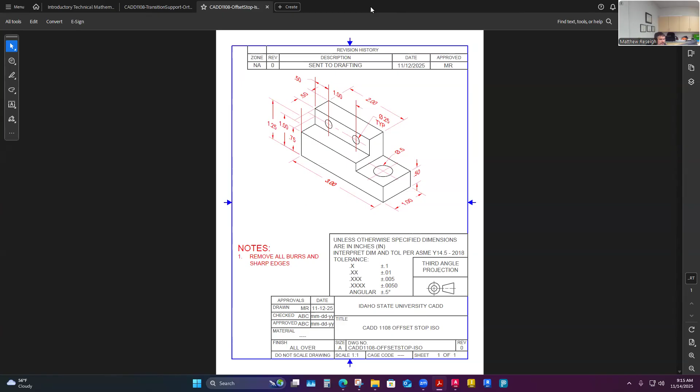And we'll start with that. Good, I like that. And yeah, I think this is kind of where we'll head here. The trickiest part of this is this elliptical, and it even looks a little choppy, but this is a hard one to kind of get at this projection angle.

So I think Casey showed me yesterday a little different technique to get that, and it worked good. So I might try a couple different techniques here to get that. I'll do the way that I've done it before, which is a little confusing, and then maybe we'll try using just a different arc function, because you have all those different arc commands, and you can explore how to maybe get this in there.

So what I end up doing when I get to this point is I kind of just build a boundary, like my little glass box for the entire object. I can build a boundary for where this would fit, because I have the dimensions for it here, so I can build like at least a square grid of where it would fit, and that kind of helps me piece this together. So when we get there, it'll probably be the last feature I put in here.

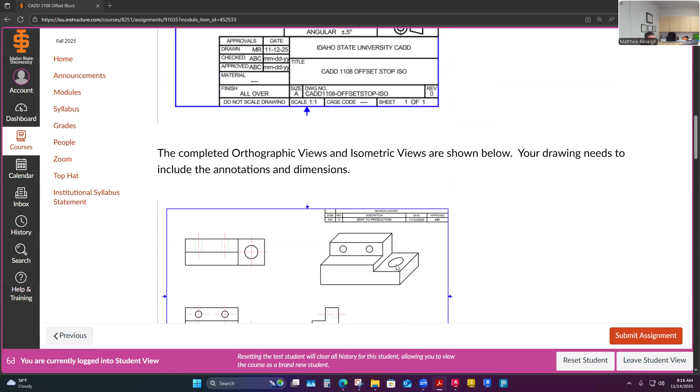So let's jump in and start drawing this thing. So I just need to open a new inch template here. I'm going to put mine on a B-size sheet, so I'll just use my B-size template.

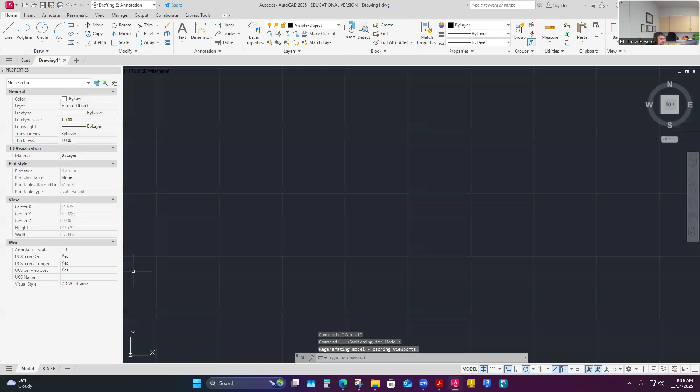And I'll model mine over here. Let's see, let me build my glass box. I don't even use the isometric planes when I do this kind of a drawing technique, so we'll use more of those again next week. So we get back into it - the first one we did this week is the one I like to do. These last two, I just want to do for learning experiences. And then next week I'll go back to how we did the base mount and use the isometric planes. I think that's the way I typically like to draw my isometric.

I do want to take over your life. Here we go. I'm kind of anti-authoritarian, so I hate doing this, but I'll do it for you.

Okay, let's see. So yeah, I'll just draw - if you remember when we do these obliques, we just kind of draw the front view. We use the overall dimensions of the front view as kind of our front of our glass box, because our projection plane is with our eyeballs right on that front view surface. So it ends up being for me just a rectangle. I want to do a rectangle.

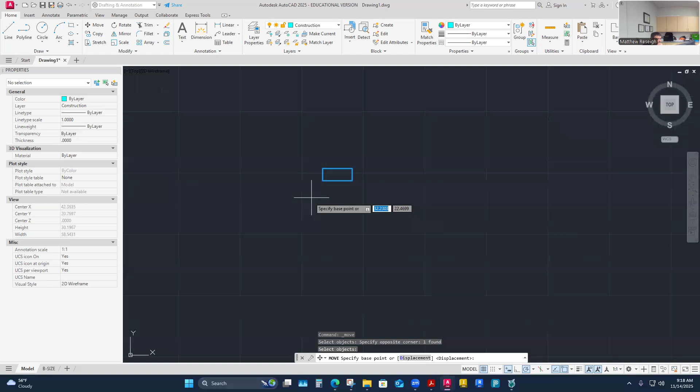That's only three inches long by 1.25 inches tall. So I'm way out here in space. I might just move this a little closer to my origin here for no reason, but here we go.

That's definitely where our front view is going to fit in. Now we're just going to do the 45-degree projections off of that. Let's make sure I got 45 on. Yep, I'm gonna do 45 off of here. There it is, and it's going to be full length now.

So our block is narrow though, huh? It's only 1.5 inches, so it's kind of like a real cube of butter here, it seems like. So let's see that.

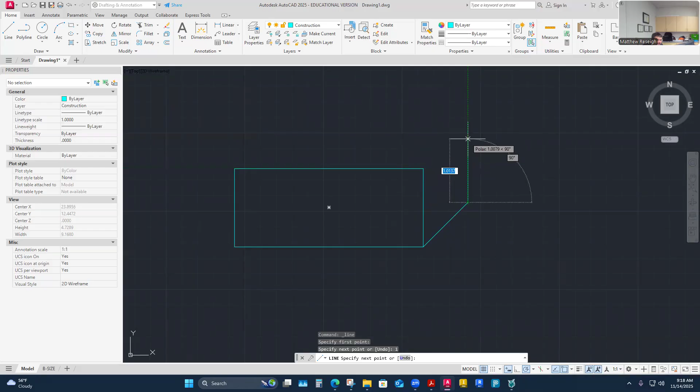I think what you'll notice is your polar tracking just doesn't like this projection angle to be able to pull that like it would on the isometric planes. So I just draw these long, and then I'll have to project over here and trim them as well. But of course I didn't draw that long enough, so I'll extend it.

Then I'll trim these. Yeah, it just doesn't snap. Your polar tracking might not snap to those alignments like it would when we're at the 30-degree projection planes and we have our isometric grid.

You can really use your polar tracking to your advantage to kind of track where they'll fall together. But this is a little bit more annoying, so I have to just piece it together. Like usually on the other one, I can target here and then pull back and it'll kind of pick up both of those at that projection angle. Well, it doesn't here, so I just have to pull it kind of long and then project still at the 45 degree here. Just, there we go.

So I just kind of overdraw for a minute, and I'll put it in the 3 dimensions of it so it'll look correct here.

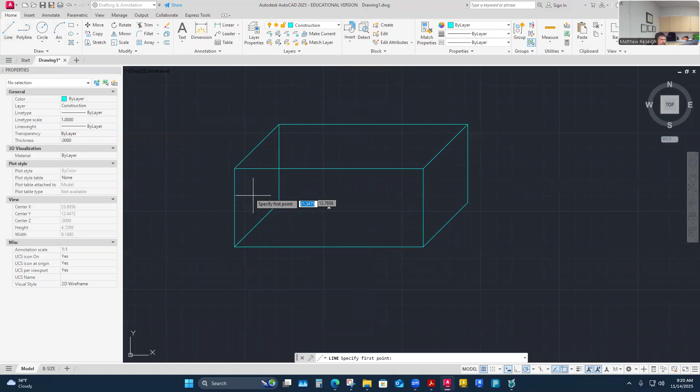So there's that, and down off this straight down to where it intersects. That's the left side surface there. Trim that out. And then we get the bottom surface like this. So bottom and back, there we go.

Here's our glass box. It's not totally necessary to do this. I just do this definitely because I'm teaching. But if you've got the view capabilities, you just draw it in. I get it, you can do that.

So this is just kind of how I show my boundary. My object has to fit in here. So it's just a kind of a tool. It kind of falls in the same way as my orthographic projections.

I always just kind of did those projection planes, but I think as you get more experience, you might just jump right into it, knowing that you have to keep things in alignment, right? So it's like training wheels, but I still use it at times, especially when my objects get complex and I just can't quite get things in alignment. A glass box always helps me solve that because I can just work on those different plane surfaces and the geometry, where it hit joins, kind of falls together.

So if you get lost on something, then just step back and construct some construction planes for you to work with. But I am going to start with this front view, even though it'll kind of bury stuff behind it. I do feel like these obliques are definitely driven by that surface that your eyeballs are on here. So let me just look at my object.

So it's 3/4 — this is the front surface I'm going to draw at real size, right to my eyeballs. That'll make this surface also just be like right perpendicular to my line of sight there too. So...

Let's see. But this is 3/4, and then it comes over. This looks like it's what, 2 inches. So it's just 3/4 up and then 2 inches over. And then this little thing is only a 1/2 inch up. So I definitely can just come in and piece together this shape of the front surface with my visible lines.

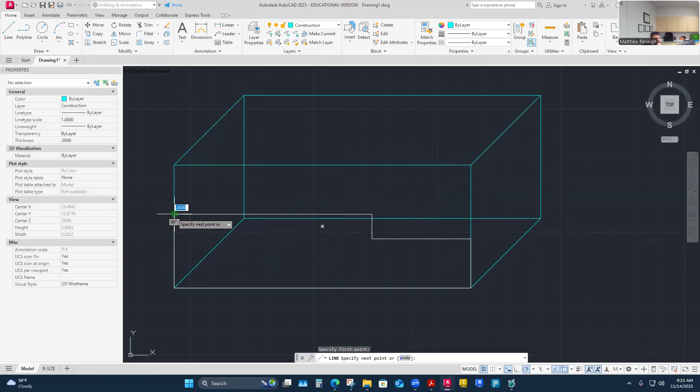So there's the front surface that I'm against here. Now I'll project away 45, right? So probably just do that on construction. I'm going to project these points just across the box, I think. It does come up here at some point to the top surface, but I'll project this one.

I don't know where it ends over there. I don't have something, but I can bring a line across here. So I'm going to pull this just long, arbitrary length. It needs to trim. It's going to somewhere that dimension will come across this way here.

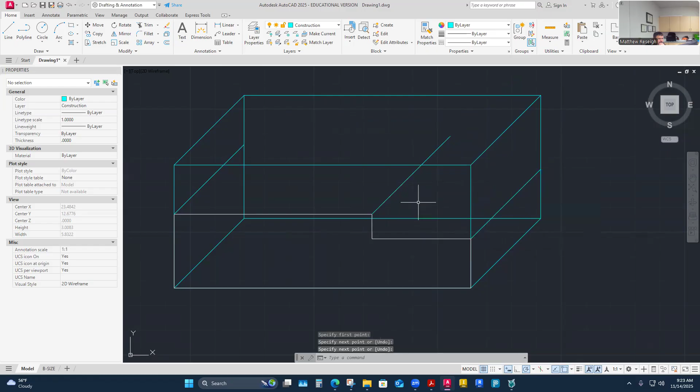I can figure that out too, but this one's easier. It'll just project across to the back edge there. And this one too, I'll project across, but I don't know where to terminate it yet.

We'll get that figured out now. Come across this way. Where it crosses here is this surface. That's as far as that needs to go. So this can trim.

I'll pull up my print and just look at it just a little bit. Yeah. So that one I came across, I'm just going to go all the way up to the top surface. This one I need to figure out how far this is.

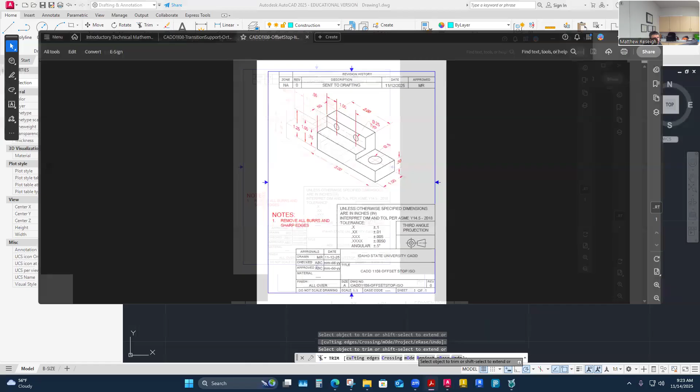I could zoom this in just a little bit. I know it's kind of small. Let's see. Because this surface here, this is a 3/4, and then that's one to the center line. It's kind of weird. This is one to the center line of those holes.

Oh yeah, so this is just the difference of 3/4 and 1 1/4. So that's a 1/2 inch. So really this is just a 1/2 inch right here. And then a 1/2 inch right here. So this is a 1/2 by 1/2 by 2, then down.

Okay, so I think I can piece in the rest of the, I think I understand that. Yeah, I'll do it right here.

I feel like I'm still on construction layer, but from where I left off here, this is coming up to the top surface all the way. So that's the, oh, sorry, wasn't quite trim that. There we go. That's that.

I'm going to definitely trace this in with visible line work. And then this I think is going to trim too, because I'm going to come up from a half, I'm going to come over a 1/2 inch and come up to the top surface. Maybe I'll start that over here and then I'll work back this way.

So definitely have some on my visible layer. I'm definitely going to trace over this. And down here too.

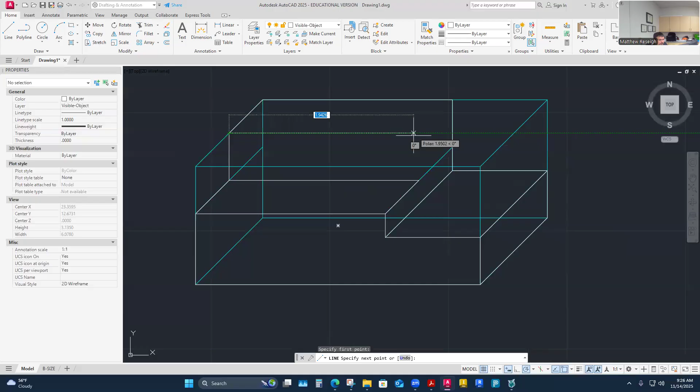It'll project. Like I said, this surface is also kind of perpendicular to my eye line of sight, my eyeballs here. So it kind of is in relation to this. I know we've slid back on 45 degrees and then we pick up this other surface.

Since we're totally perpendicular to this surface, we're going to be totally perpendicular to this surface. That's kind of a strange thing, but it's just because we're not on a projection angle this way. So we just get distorted stuff across this depth mostly than anything.

And the right side, this right side is as for sure. I mean, it's a distorted kind of view here too. But here's kind of a true, these are actually true lengths right here.

And this is a true rectangle. So my circles, what it means is my circles will actually be circles. They won't be ellipses because I'm perpendicular to these two planes. And then I just got to finish this, right?

Now if I turn off my construction lines, I should have everything. I don't really need to trim that because I never traced—that's just construction work. So if I turn that off now, this should be completed. Cavalier Oblique.

Let's do some features in it though. It's got some holes, so I'll do the easy ones first. That'll be these two that go through here. They're through.

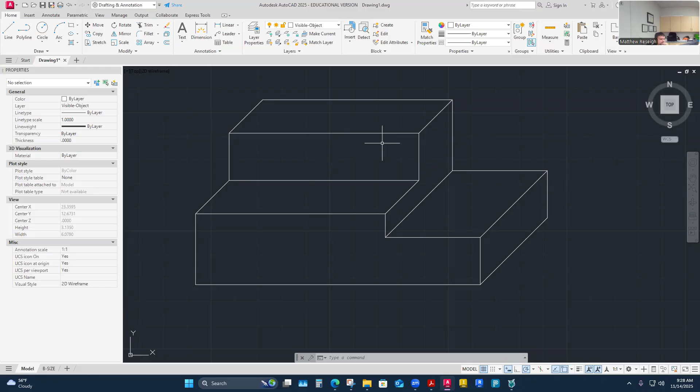So I'll lay them out on my construction layer here. Let me see what their dimensions are. Come over a half inch and then one inch over, at least from the left side surface, half inch and then one, and then come up from the bottom. One inch is this one. This is a little bit weird to see, kind of hard to actually dimension something like that, but what I'm trying to show is it's one inch. If I could track this over, this is from the bottom surface up one inch to the holes, and then from the left surface half and one, and they're quarter inch holes.

Okay, we do a lot of quarter inch holes, I feel like, because we do a lot of 3 by 4 by, or 5 by whatever blocks, small parts.

Let's see, so to lay that out, maybe—which one? Right here, this is a half inch. Half inch, yep, and that means this surface is a half by 2. And this one, yep, this one is a half inch. Yeah, I think that's right, because this is a half inch, total is 1. I don't think it was explicitly given here, I'm just doing a little math. One inch overall, for sure the top surface is a half. Yep, this is a half.

So I can also just come over to the side and say that means if this is 3/4, and that's 1 inch to the holes, just a quarter inch above that is going to be where I'm going to draw my line across for a center line. And then I'll do my vertical center lines at a half inch and 1 inch.

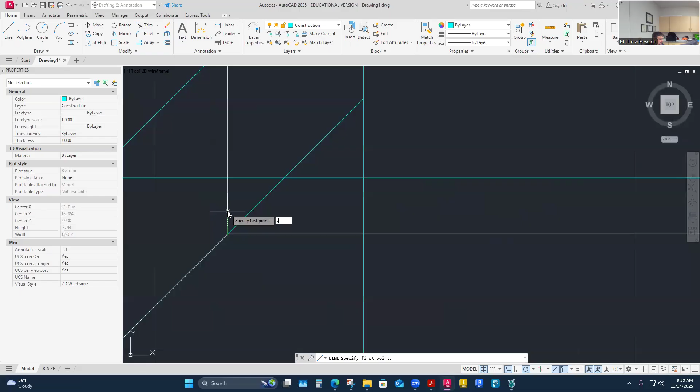So I'll come over here, maybe just up from here—I'm going to do this as construction work, I guess. From here up, it only needs to go up a half inch, or no, a quarter inch right here. Quarter inch there is the center line across. I'm going to draw that all the way across.

That means it should measure from here to the base a 1 inch measurement. Yep, 1 inch is what's given on the drawing.

So that's good. And then I've got to come over a half inch and draw down, and 1 inch from there and draw down. So I'll come over here, cursor over half inch, then draw down and across—at least that, I'll draw it across the surface here. This is the center I'm looking for though, for the hole. And then one more from here over, it's like an inch over from there, and then down.

That should make that an inch—this is, or sorry, that's a half inch, this is one inch. This should be a half inch because this whole thing is 2 inches. So a little check here is that this should be a half inch. Yes, it is. So technically these holes are centered in this surface, I feel like, or at least symmetrical in the surface.

I'm going to draw those in. This one I moved over half inch. This one's an inch in between the two holes.

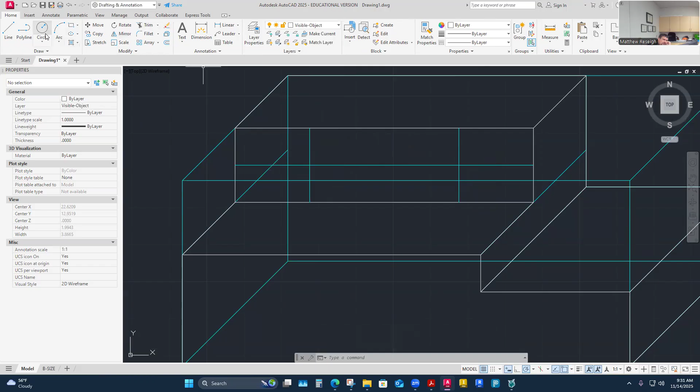Then I need a circle—they're quarter inch diameter. Sure, I'll do circle diameter here: 0.25. I'll copy that circle, just by its base point, and copy it over here.

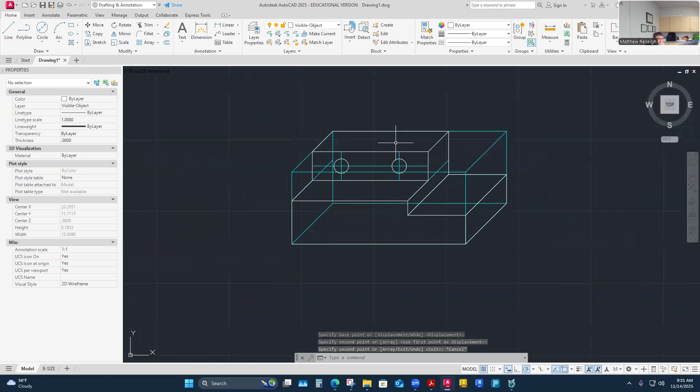And then this is pretty thick. I think I told you on the last one how you would check to make sure you're not going to see that through, is that you kind of need a center line there. So I'll do this check, even though I don't think it's going to show through—you don't have to do this, but definitely get in the habit of checking yourself. This is a half inch thick and it's a pretty small hole.

So if I just project, this is kind of the center line that I'm taking over here on projection, and then I'm coming across an arbitrary length there. But then I'm going to take this center line over too, and where it intersects here—I'm not looking for a midpoint, I'm just looking for an intersection point there. It's kind of close, I'm going to pull that a little long.

And then I'm going to pull this one down to the bottom of that surface too. But I'm just looking for this cross - this is the entrance hole center line, and this is the exit hole center line.

I feel like in our actual 30-degree drawings, it'll show up a lot more where we'll be able to see the exits, some features of the exits from the entrance essentially.

So it's good to keep track of those when you're doing these kind of drawings. How I check that is I'm just going to copy this hole, so this will be a through hole through center, and it'll exit here. You can see that nothing will show through - that's the only time I'm going to keep this as a view, because we don't show hidden line work, we're not looking to do hidden work on these views. I would only keep it if it would peek through and I would see some of the exit hole through the entrance hole.

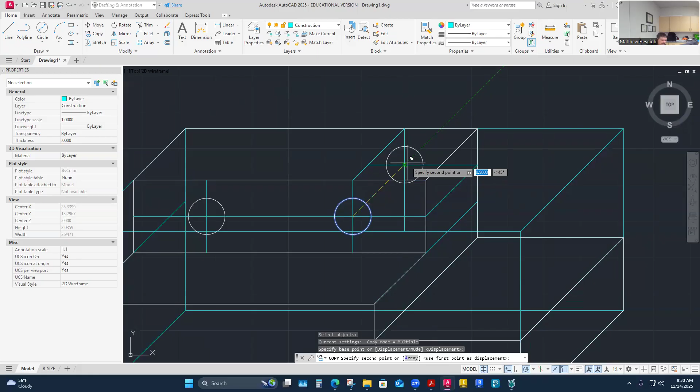This one, it's quite a far distance apart, and it's just because it's a small hole, and for the hole size it's kind of a thick part - it has depth to it that I just am not going to see it. So I can eliminate it, but I do these checks just to make sure so I don't get caught off guard that I should have shown some visible work there.

And then, yeah, see, I can, and then this one. So now what I'm going to do is I'm going to draw this. So now I'm ready to do this elliptical feature here.

And I'm going to draw a center grid here, and then I'm going to draw kind of a boundary for it. And so all it is just this half-inch diameter circle, and it's on center here. I don't even think there's any dimensions here.

That's not great, I wish this should be dimensioned. So I should redline myself to give myself that - this is 1 inch by 1 inch, and so this is on center of 1 inch by 1 inch. You wouldn't know that though. This is underdimensioned, there's no dimensions to this hole.

I've got to do this as a redline. So I should say that this is, you know, half inch and a half inch and a half inch hole. So I'm missing 2 dimensions for this really, now that I'm working off of it.

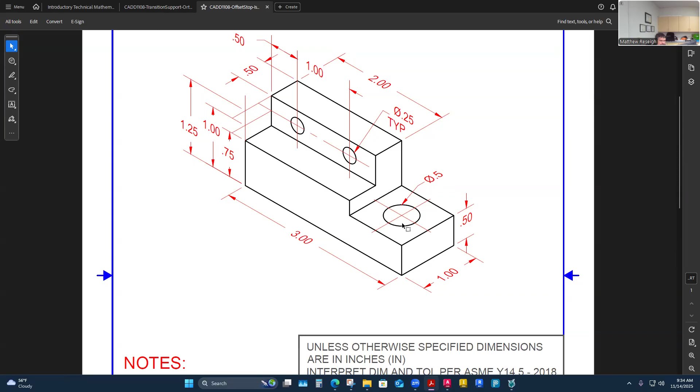There's the midpoint of this line from here to here - that's half inch, right? Move over, there's half inch. I'm going to drag it across to this midpoint. These are my center lines for that hole, at least. That's my first start, that's what I do - center lines. That's where I can start the center of an ellipse here.

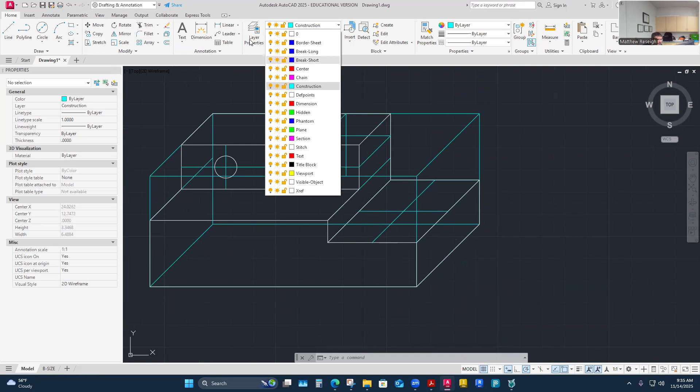You just won't be able to pull up like an iso circle because we're not on a 30-degree plane. So then what I do is I also will build a boundary for it. So maybe what I'm going to do is just quickly build another construction layer - I'm just going to make a copy of this thing.

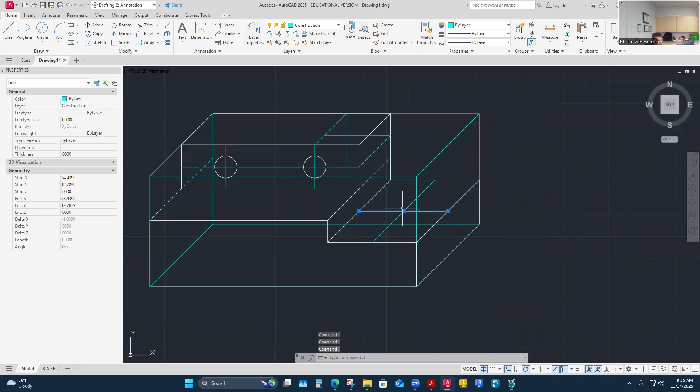Call it construction 2, and I'll keep it the same color. But what I want to do is be able to turn off my other construction layer. So these two center lines I'm going to put on the other construction layer, just so I can focus on that layer there, because I don't need this getting all busy here. I'll jump over to construction layer 2 to draw, so now I'm just focusing on this.

So then what I do is I build the boundary for where that elliptical arc should be in here. And so it is a half-inch diameter, so I'm not going to offset these lines because it doesn't like to offset down this axis necessarily. So I'm just going to draw these lines. I'm going to come over a quarter inch and build myself a little rectangular grid - it's going to be a square grid where the boundary of the ellipse lives.

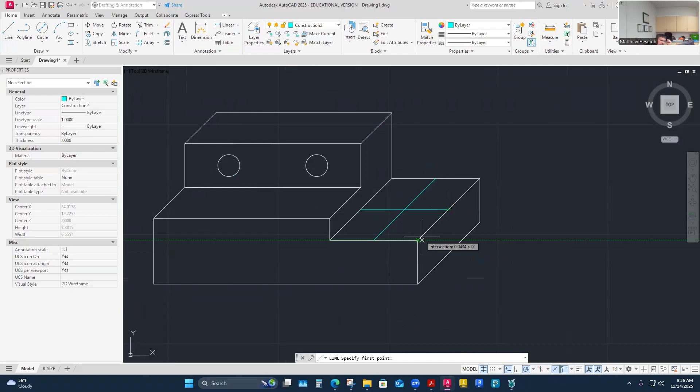So let me think - I'm just going to come over here, maybe just cursor over here. I don't think it'll let me draw that line either. So what I want to do is, yeah, I'm just going to actually draw a line then - it's going to be a quarter inch away, 0.25. There it is, and then I'm going to drag this across.

I'm going to do the same thing here. I'll draw over a quarter inch across my line, then go back across. That ellipse has to be only that wide, from one quadrant to one quadrant. Then I'm going to do the same thing here, tracing this over a quarter inch, 0.25, and draw it across at that projection angle, 45 degrees.

I'm going to repeat that, drawing this 0.25 and across. So I've made this big busy grid here.

All I really need, I can trim this now. All I really need just to see the grid itself. You don't have to trim this if you don't want, but I'm just going to trim it. Mine doesn't like to track.

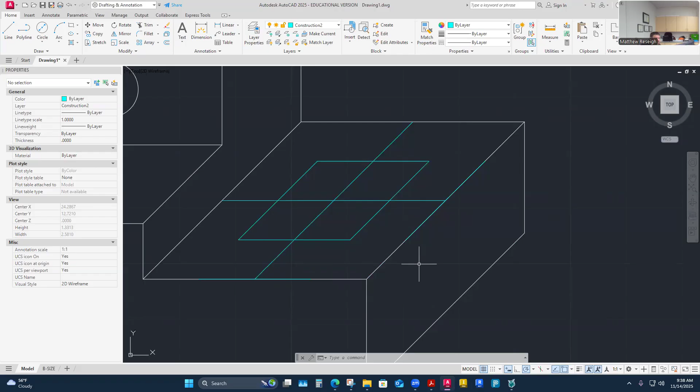I definitely drew those lines so that I could draw across, actually drawing over the top of my lines, because it doesn't like to cursor over when it's at this weird projection angle. So I'm drawing a hard line there so I have an endpoint to pull from, because I just needed to establish a quarter inch off of center each way, and a quarter inch off of center each way here.

So this is just a way to do it. There are definitely different ways, but this is how I get my hard points and drag them across. Then I just trimmed the lines I drew across because it's a little busy.

What I'm showing here is that this ellipse lives in here. It kind of goes from here to there, then comes around to here and back to here, and then back around. So these are the quadrants of this ellipse at a weird 45-degree projection angle, which is just something CAD can't automatically draw.

Or if it could, I'd have to dig through and find out if I can change it. I don't know, I'd have to do a little bit of checking. Maybe it can, maybe it can't, I don't know.

But I can piece this together now.

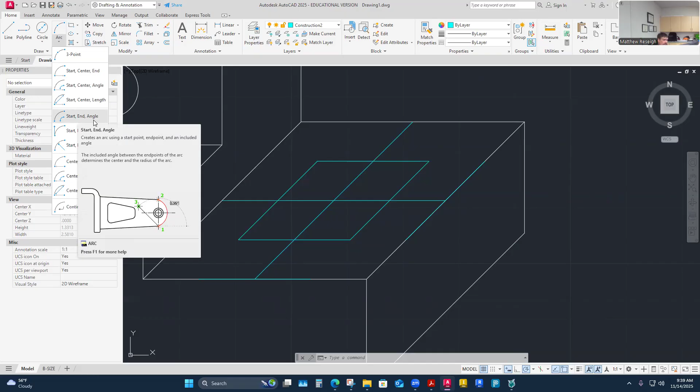I think one thing, the way I think Casey showed me, I'm like, oh, I haven't drawn like that, pulled down a start, end, and an angle. So I can try this. Let me just see how this works and see if I like it, and then I'll show you my way, or the way I did it, which is a little bit different. But start center angle, or start end angle.

So I know I'm on that construction layer just to see this, but this would be like if I'm just looking at what this ellipse is. Well, this would be a start. Specify endpoint of arc, well this is the endpoint of the arc. And then it's like specify the angle of the arc. It might matter on which side I actually start or stop this, but it would be 45, which is what I'm looking to do.

Only I may have to start this the other way. Let me try this again. Same one, start center, yeah, and then this is my...

Actually, yeah, this is going to be the way I would want to do this. So this is at the 45 degrees, so that would be that arc in there. It actually works really well.

Like this, but you have to start on the right point. I could tell that when I picked the other one first, it was going to arc the other way. So I came back and exited the command and started over here on this point, start here, set, end here, and then pull this angle.

So this is correct, like that. That is the arc that I want. There's the center point clear out here of that arc, but it's like drawing an arc at a 45 degree. Yeah, that's interesting, that's a good way. I can't say I've hardly ever even used that command, but now I like this.

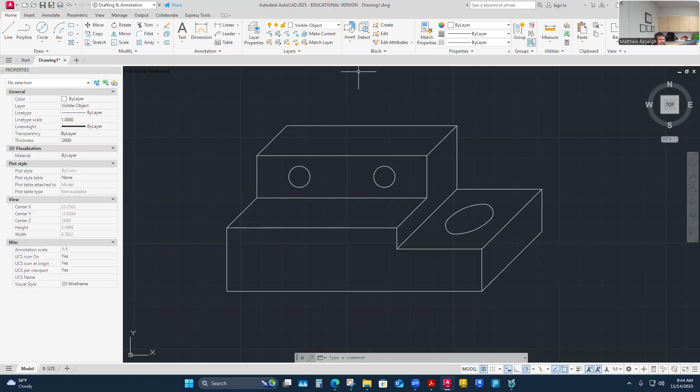So I'll show you the other way that I've done this. You don't have to do this, but I think that's probably the easiest way to do that. So the way I have it is I'll just briefly do a little manipulation here. I'm gonna make myself one more construction layer to show just another method, because the way I did this is a little bit more like pencil.

And I did do some pencil drafting in my early days, never as a profession, but just in some schooling I did for sure.

Let me copy this. Maybe the method that I think is more like a pencil method, because the pencil method will use a few different more construction things.

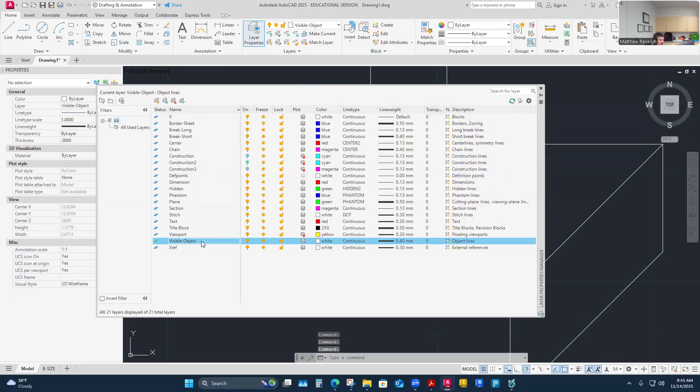Yeah, it does look like it has a point or something. Yeah, I feel like it's like a compromise a little bit. So I'm just making myself a third layer real quick. I'm gonna actually make myself a second visible layer just for a second. This is just for my video purposes mostly, and for one other method of doing this.

So all I want to do is push these segments off for just a minute. I could have just pushed them to a construction layer, but I'll just make a new visible object. It should be clicking the horizontal line, the vertical line, and then going to a 135 angle.

Yeah, so I'm using that depending on which quadrant I'm starting in, but definitely like a start here. And I think I ended up moving this one clear right there, a little bit.

That's a 45 clear out. Yeah, probably the one I'm pulling up there.

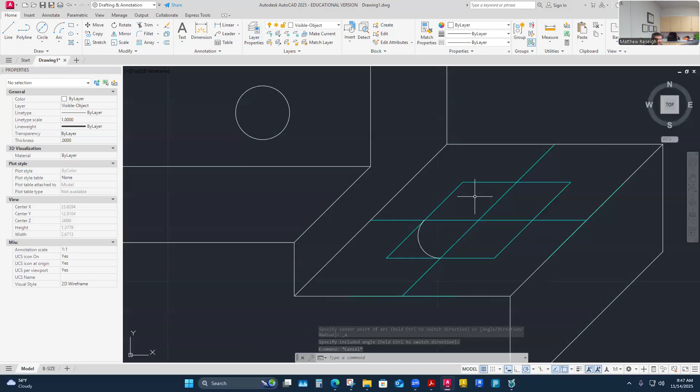Yeah, if you could mirror maybe across here from point to point through here. Yes, that's good. So here's just another method.

This is more for me than it is for you guys, construction layer 3. So, what maybe somebody with lines like a protractor and some lines and doesn't have this awesome sweet command in CAD

would do. They would lay out this boundary and then they're going to drop these center marks down. They're going to look for the center of the arc to draw, whereas that defined it for us based off of its projection angle and the two endpoints in the commands in CAD.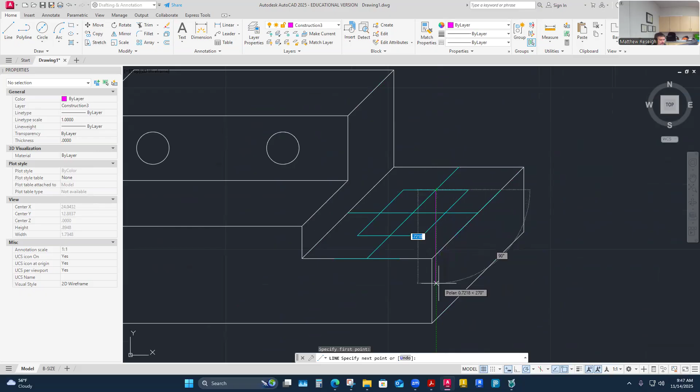They would maybe draw from these centers down, this center down, maybe this center up. If I just think of where I'm looking, I'm looking to establish the center mark for

this arc, and this one is going to be for this arc out here. So I'll just focus on just one quadrant at a time. This would be the, so let me get rid of this one just for a minute because it's working on the other quadrant. But I'm going to draw this one down.

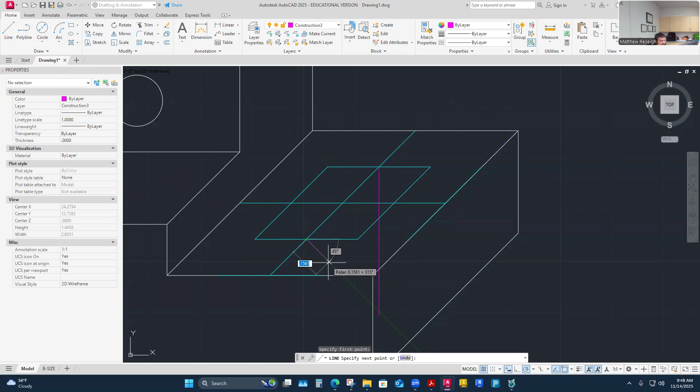Then I would be looking for a center mark, or a center place out here for an arc. So we would drop this one vertically down, and I think we drop this one in from this quadrant at the 45-degree projection angle. And I'm looking for where they actually cross, like this. And this should be the center line, I think, of the arc for this.

So if I was going to draw a circle radius, maybe if I didn't have the arc command, we might draw something like this. And I could be a little, I think I'm a little bit off here.

So let me think. I think hold on with me, bear with me. I'm close here. Let me make sense out of this. Pretty sure that one down.

I don't think it's this one at a 45. I don't think. That'd be clear out here. This one, yeah, not this one. This one definitely down.

That's it right there. So what I'm doing, I guess if that makes sense to me, I should have thought about this quadrant yet. So it's just I'm going to pull one down, and then I'm going to pull one across at the projection angle.

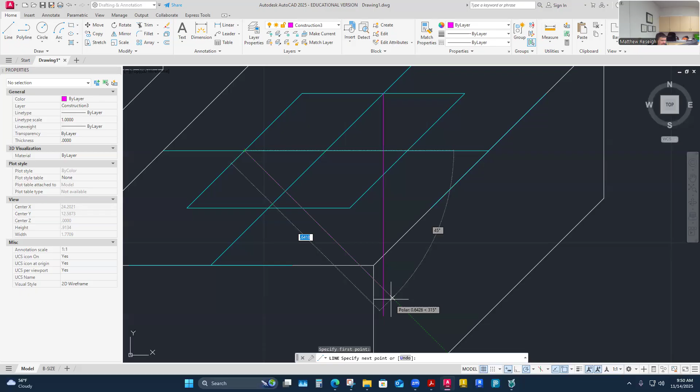This is 45 degrees. I'm going to snap to that, and where that crosses my one that I dropped down, this is kind of the center line for this arc.

And so somebody with a pencil and templates might pull something like this, and then they're going to pull that radius to that quadrant. You can see it's going to make the same kind of section of an ellipse.

So this is another method if you didn't have a quick command, and you can identify geometry maybe a little bit.

This is definitely a little more pencil-y that somebody might do, but this would be something that could definitely identify geometry a little bit because I would do this one, and then of course all this is going to get trimmed out.

And I probably could have done just an arc with a center and the two endpoints, right? Because this is all I really want of that is that.

And then I would have to sit here and analyze, okay, this one here, how am I going to do that? Am I going to drop this one down and one at a 45? But it might take me a little bit of trial and error.

But all I'm going to do is be dropping for every quadrant a center line down. I'm going to be looking for one projected at the projection angle where they cross. I'm going to be looking for a center line here. So yeah, this is a good one to piece together.

So the next quadrant, if it was right here, I have to see. I think some of it I can use the same. It's going to be, I have to visualize, well, this is the arc.

So my center point's out here somewhere for this arc. And where is that going to be? Well, it's going to take me a minute here.

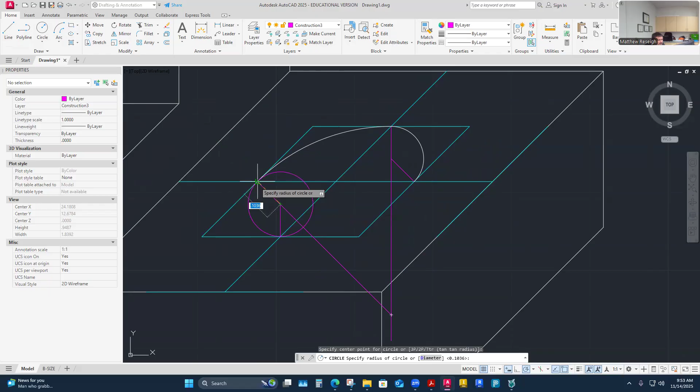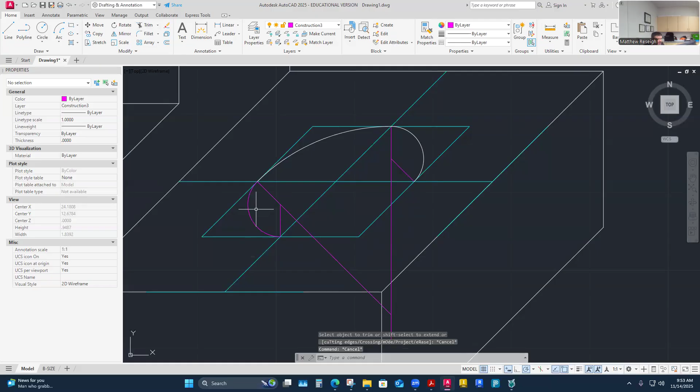And then this one to this one, I've got to kind of do the same little thing. I think I'm going to extend this one up out here somewhere, because it's going to act as my—this arc here definitely has a center out here somewhere. So where is it at? Well, it's where this meets, probably projecting through here. Maybe if I extend this one through, it does double duty for me.

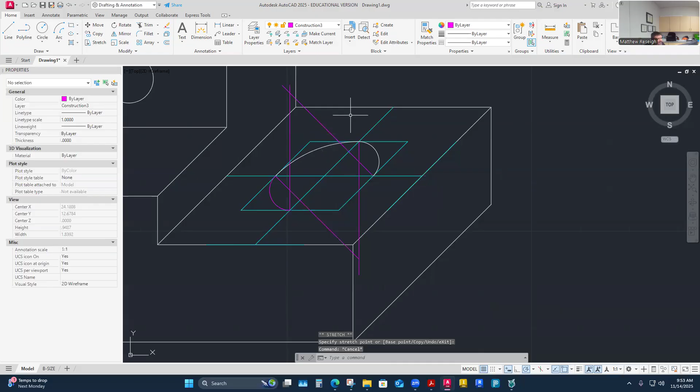Oh yeah, isn't this great? I love this. Oh yeah, it does. This is what I'd call appreciation for our ancestors and how they visualized geometry. They're pretty good. They didn't rely on this computer program with its fanciness. They did stuff like this.

Yeah, so this does go into—you just start dropping lines, you start dropping it pretty much. Somebody probably that was pretty mathy at the time too, so they were just like, oh, I can see easily where the center line is. The one thing that helps me track is that I just kind of visualize—I can visualize where the arc should go even before I draw it, so that I know there's a center line out here where that arc is based off of.

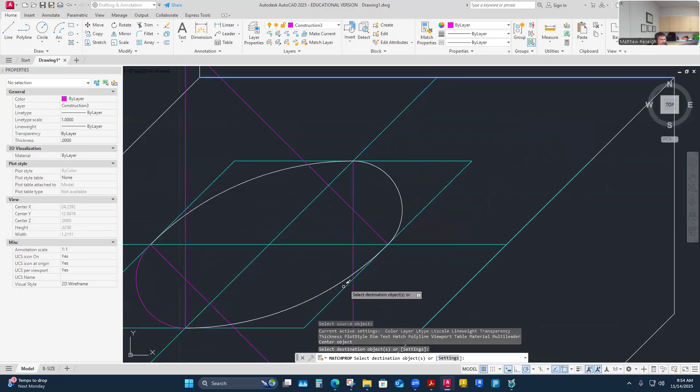Yeah, they were better—I could argue maybe they were better with their geometry and visualizing geometry. But yeah, there's that, based off of kind of a center line, projection line, arc based.

So let me turn off this layer, and I'll turn off even the grid pattern under these. Then I'll turn on my little visible and let's see if it matches. This is it—voila, let's see. Hey, I couldn't tell there was anything different. So it's the same—this is actually the exact same.

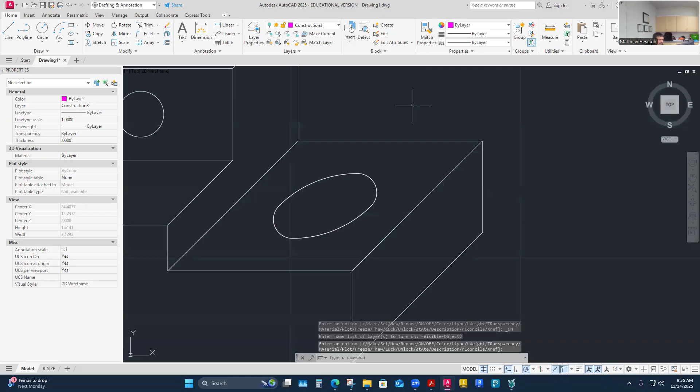Yep, we got there the same way with an easy CAD command versus somebody that has to really look for center lines and know where they're dropping. But yeah, that's good, cool—the easy way and the hard way. And then that's it, we don't have to put any center lines on this or whatever. This is just going to become that view for us.

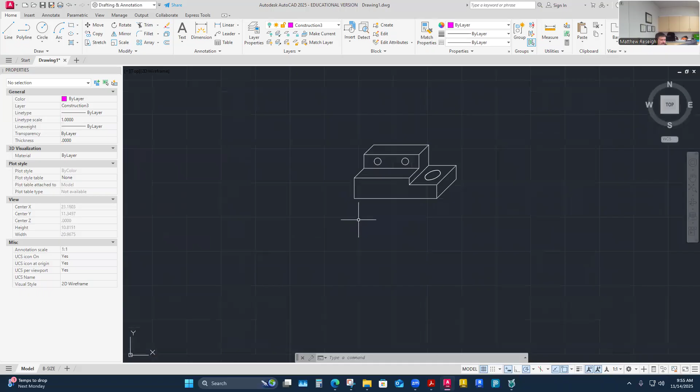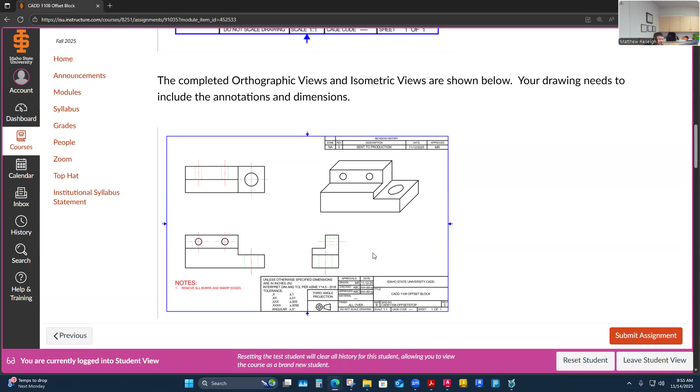And so that's really all I wanted to get to today. Then you can build your orthographic views and dimension them all out, just leave that thing as your standalone drawing there, just like I've got here. That wraps up our week of this, and we'll do more next week, but we'll use those ISO planes and make our life a little bit easier, I think. Like I said, I never put any views of mine in these kind of obliques for most of my mechanical drawings. However, sometimes when you go full isometric on these two 30-degree planes like this, sometimes it doesn't distort, but sometimes it doesn't display the features you're trying to show.

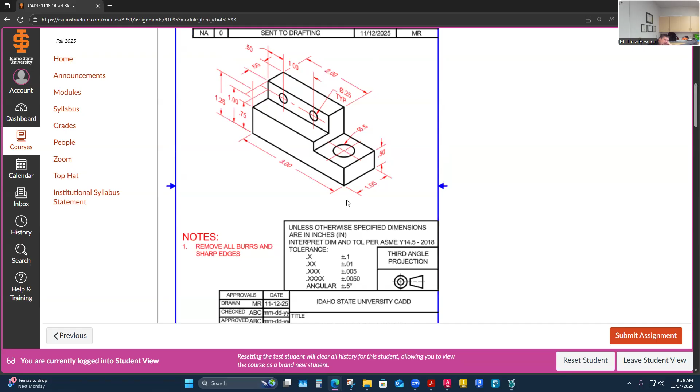When we get into Inventor, it'll drop these views really fast and easy for us, and we can manipulate the angle of the projection just a little bit to show features. So that's one thing I would do—I wouldn't necessarily try to draw it on a different projection angle. I would just take the standard view that it gives me, and then I could actually manipulate it just a little bit to change the projection angle, mostly to show features that might get lost or blocked that I can't see, and I'm trying to show it.

So anyway, heck yeah, let's call that good. Done deal. No, you gotta do the whole drawing.